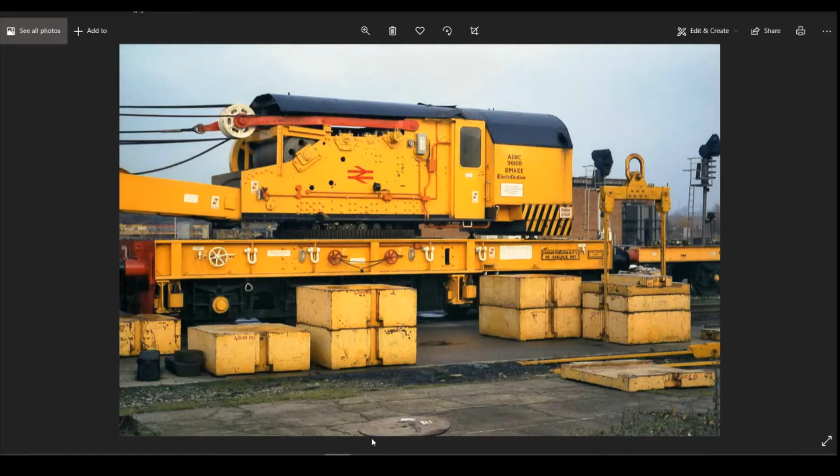In the last episode we drew this little jib here that holds the pulleys. As I said on that episode, what we're looking to do today is draw off this drum which holds all the cable here, and then the little frame that goes above it.

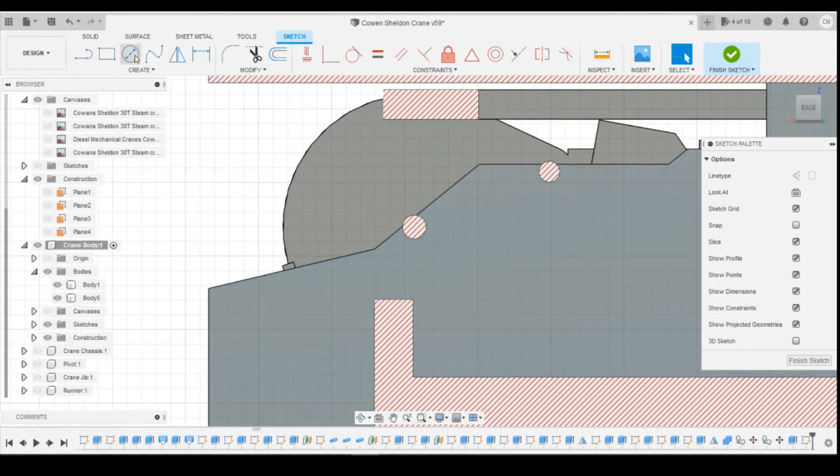Okay, so jumping into Fusion, first thing we're going to work on is adding in the drum on here. So if we create a sketch on the inside surface here, and slice through to get to the inner surface, we create a circle, so it's going to be on the inside. We need to work out the diameter here - you can see it's about half the diameter of this big one here, so that's 9. So we're going to go for about 4.5 millimeters, something like that.

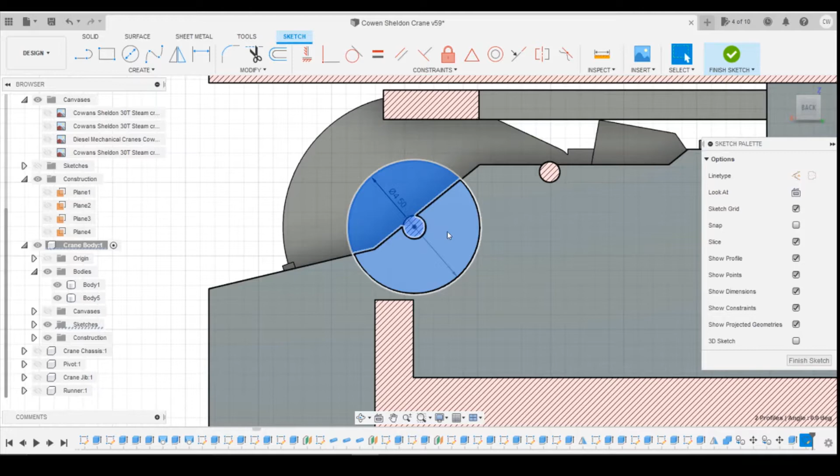And then we can extrude this all the way through. We need to turn that slice off actually, and we can drag that through to the side here to join.

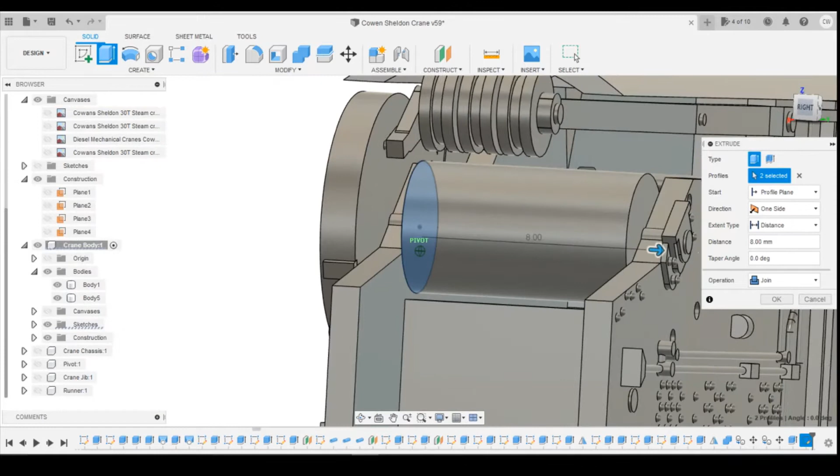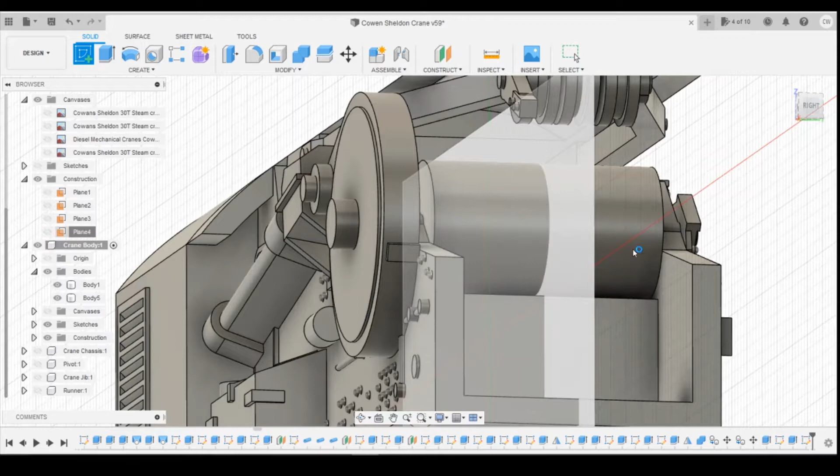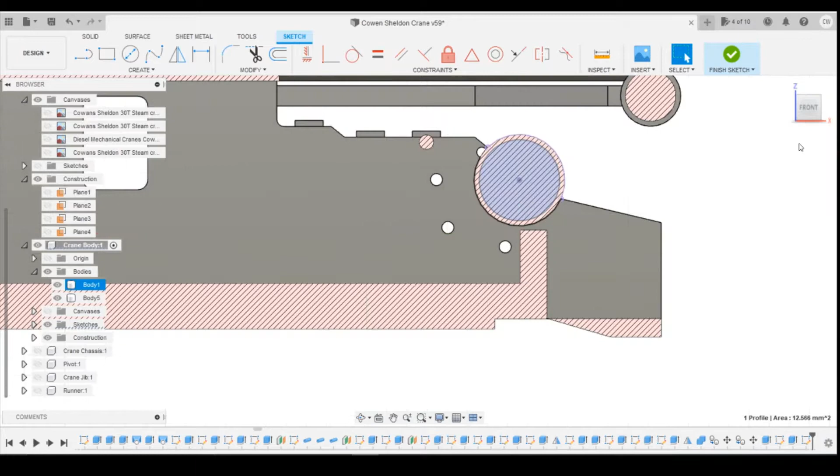What I'm then going to do is create - yeah, I'm going to create an offset plane from - actually, we can create a drawing on that inner plane here. Slice through, let's project that circle, and then we can draw one there. Actually, going to go for 4 millimeters, and then extrude that symmetrically.

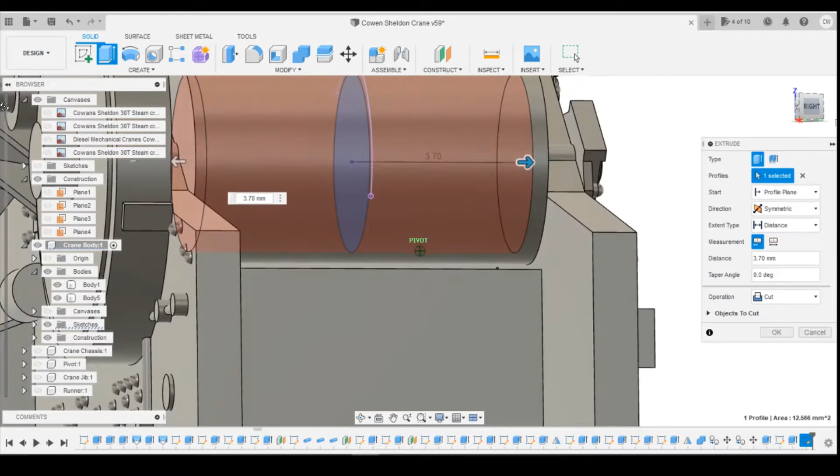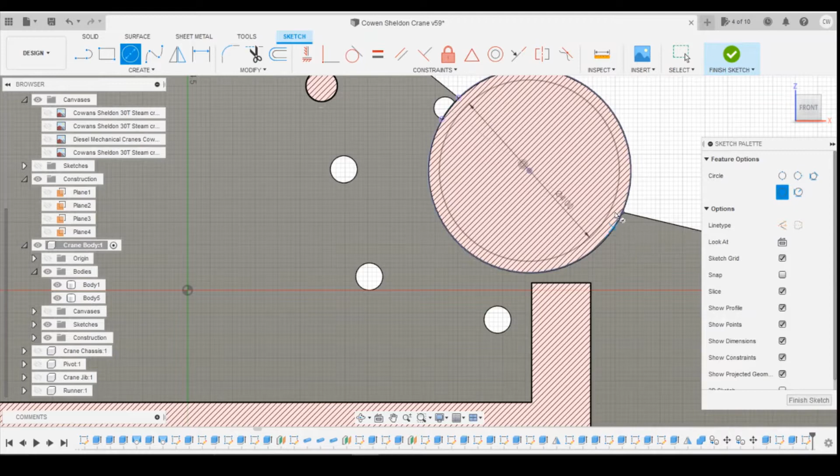What I'm looking to do is just leave a little bit either side, taking a chunk out of the middle. Actually, I've selected the wrong part there, let's go back into that sketch. Slice that, I need to project this part as well, and I need to select - I need to draw it. Actually, then I can select that section there, extrude that symmetrically. That's what I'm after. So I'm creating sort of a recess on there that I can wrap some thread around that goes up to all points.

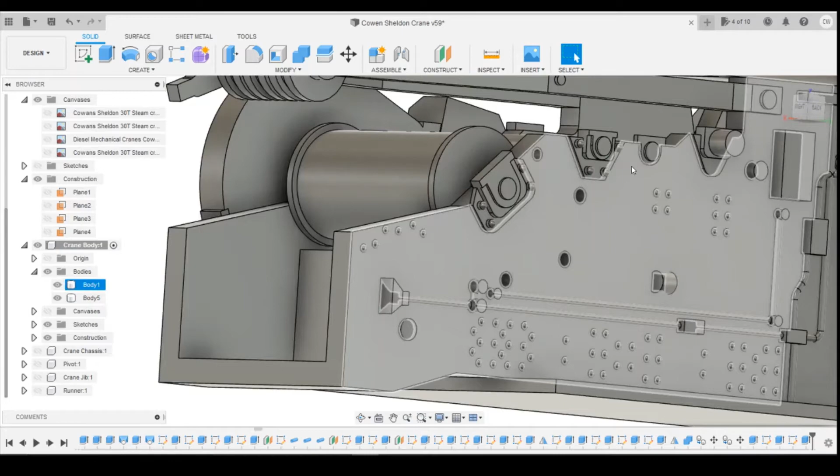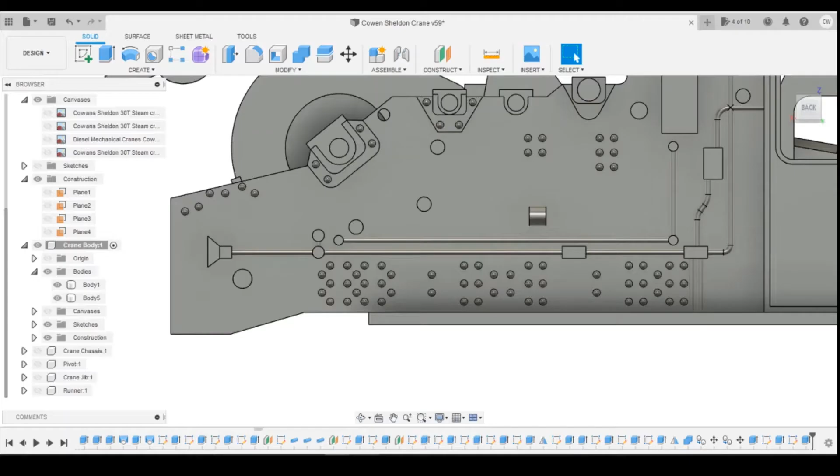Okay, so the next thing I'm going to be looking to do is draw this frame, which isn't going to be as easy as it looks, unfortunately. So first thing I'm going to draw, I think, is this upright here. So that ends sort of where the rivets are, in this sort of area, and it goes up diagonally and sort of rests on the bottom of the jib here.

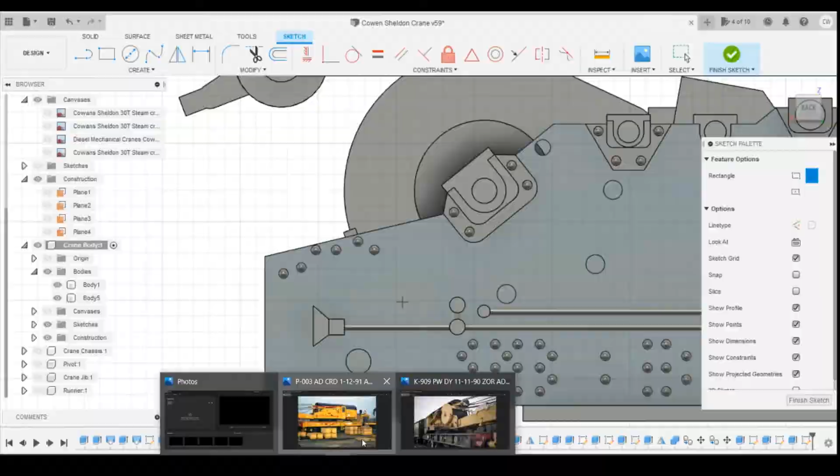So create a sketch here. I'm going to be using a 3-point rectangle because it's a slight angle. Height wise, it starts just below that rivet, so about here. Let's go upwards actually, at that sort of angle. 0.5 millimeter thickness.

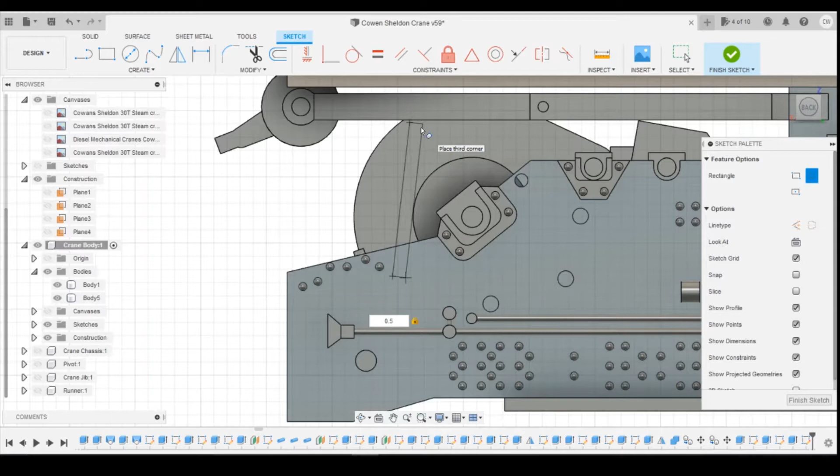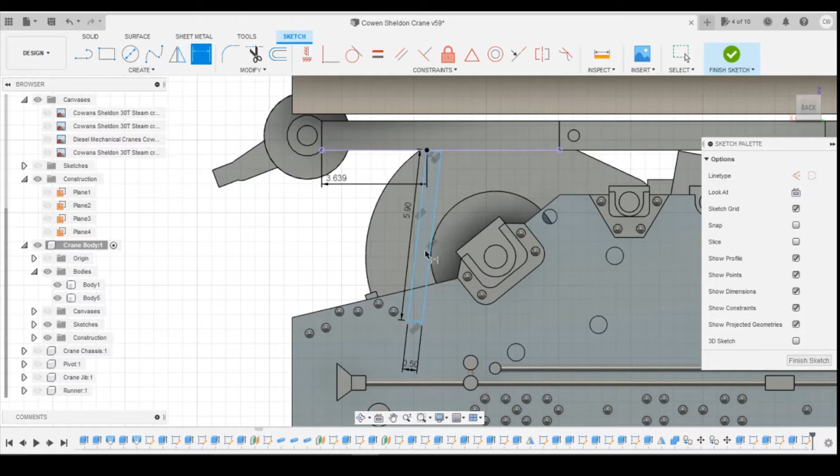And then I'm going to coincident that to that line. Okay, and define measurement - I'm going to do 5.9, easy. Distance from there to the end of the jib - I'm going to leave it where it is, 3.639 millimeters. Also it wants the angle defined, so angle from there to there, and that should define that.

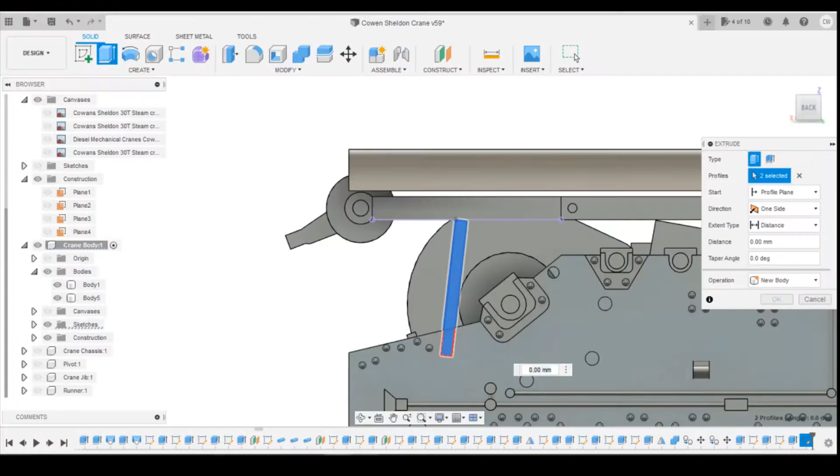Okay, so when I extrude this now, same as before, I'm going to create that as a new body, and that comes outwards from that face. So I'm going to come forward to say 0.4 millimeters, and I want it as a new body so that I can move it across to the other side.

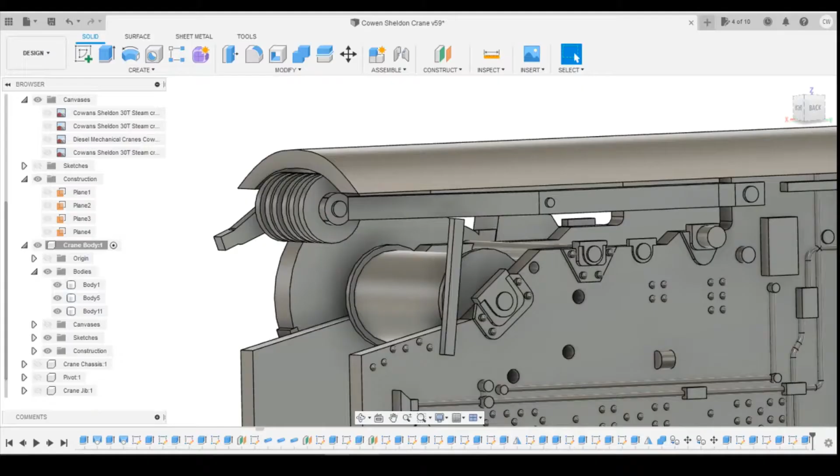Okay, so the next part comes across and joins the frame here. I'm going to create a sketch on that face, drawing on this inside face of the beam we've just drawn. And maybe 0.6 millimeters - how does that look thickness wise? No, it's probably thicker than that. Let's go 0.8 millimeters. Define the width - it should be the same as the beam here, 0.4.

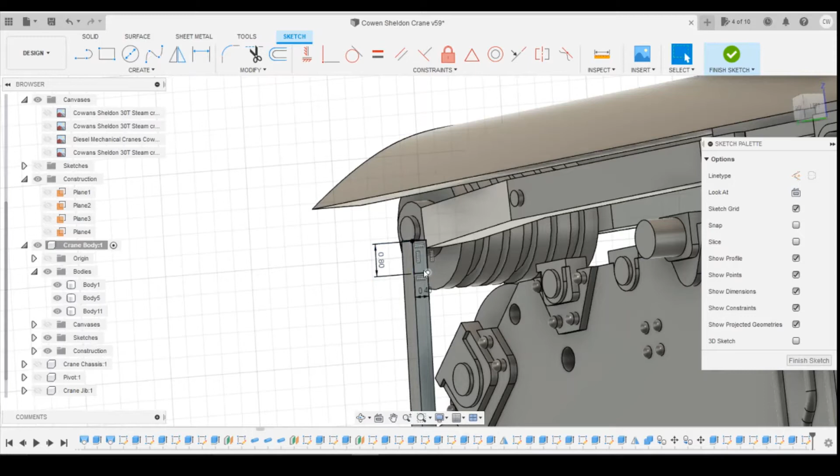And then we're going to extrude this, and hopefully this will come down to where we want. It needs to get to this corner, unfortunately. So what we could do is make that a little bit thicker - it probably actually looks like it needs to be a bit thicker. Lengthwise, 5 millimeters, looks like it's okay. So if we just go back into this sketch, let's make that 1 millimeter.

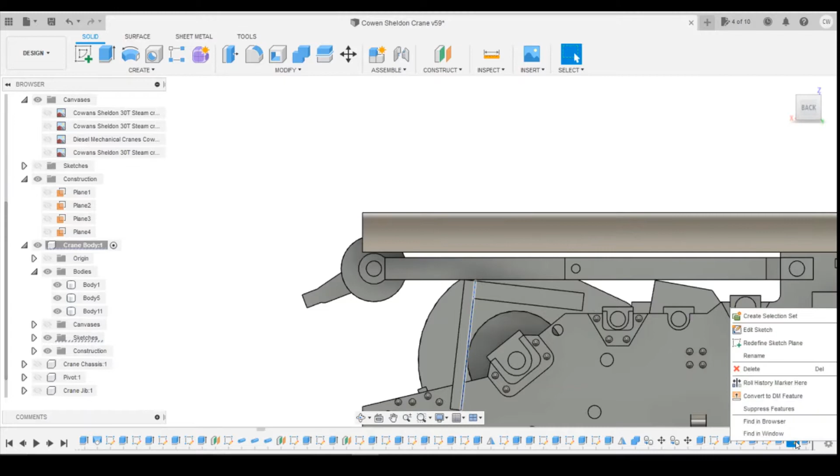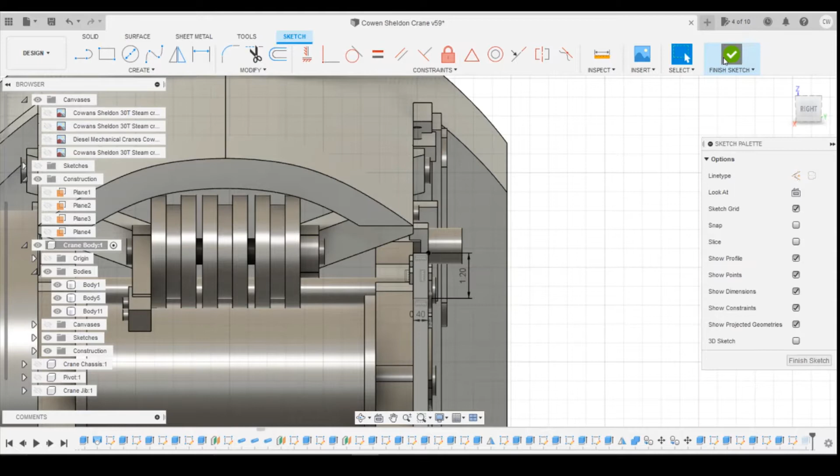This is now touching on that plate there. Probably wants a little bit more actually - 0.2 millimeters. That looks better.

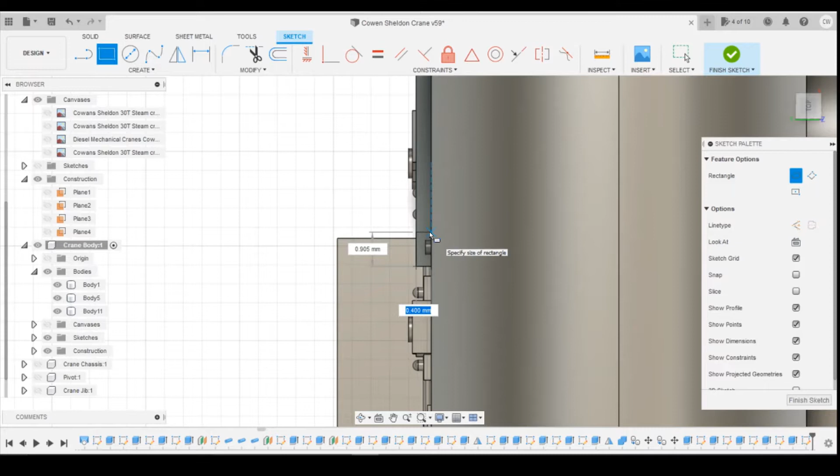Okay, and then on the top there's a small little plate that comes upwards and this rests on. So we can just draw that on there. It's going to be 0.4 thick, and 0.8.

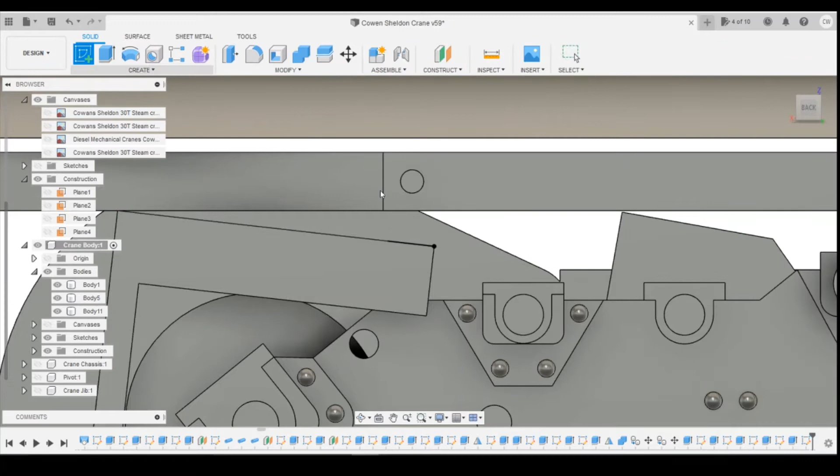Do a sweep, I think. Finish that sketch. We could sketch on that surface here. Just draw a line upwards. That's going to be coincidence to that. I don't want it joining there, so I'm going to turn it off now. Then finish that sketch, and as I said, I'm going to sweep that profile along that path.

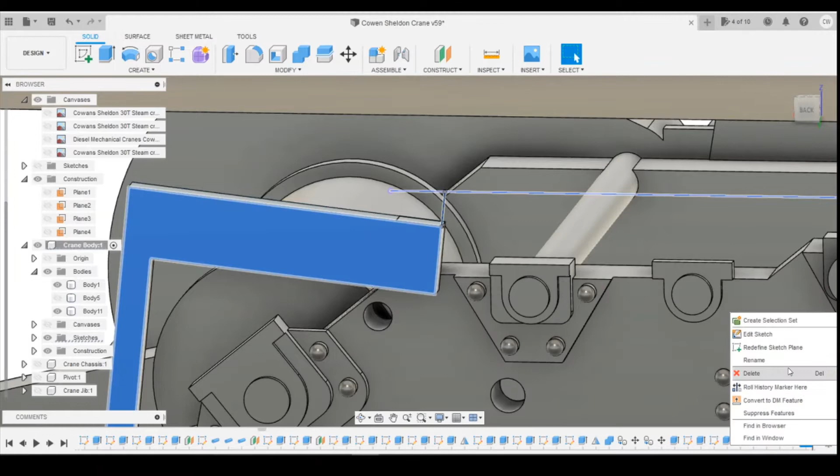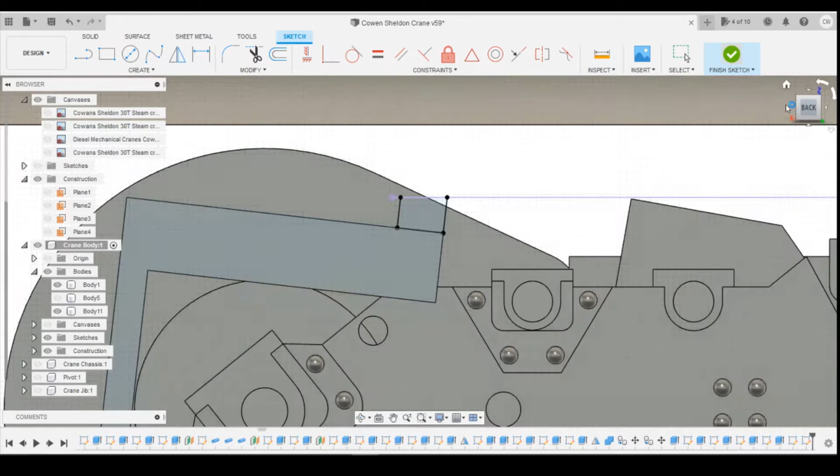I'm going to create another line, so I'm going to create a negative sketch there. Draw another line. It's going to go from that corner, so I'm going to have to coincidence it to that corner and come upwards. That's going to be that to that point there, and that's going to be to that point there.

Use the sweep tool to take that profile along the path, and guide rail along that profile. That's one.

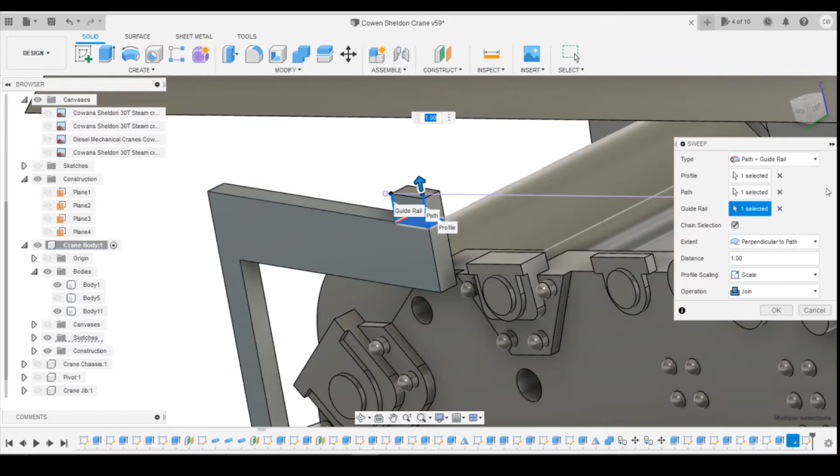Extents like that. So then you've got a sort of diagonal top here that this beam's going to then sit on top of. Hopefully that should join to body 5.

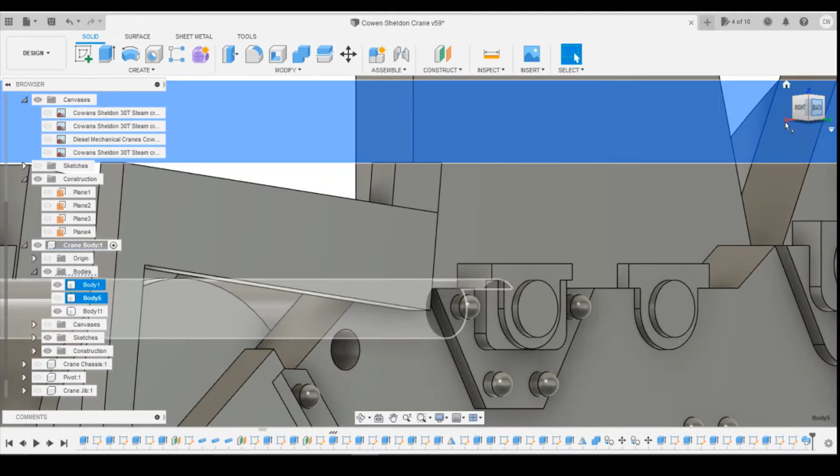If we turn that back on, we've still got body 5 separate, but it's sort of inboard, so we're going to have to drag these inwards slightly. Let's turn off the body.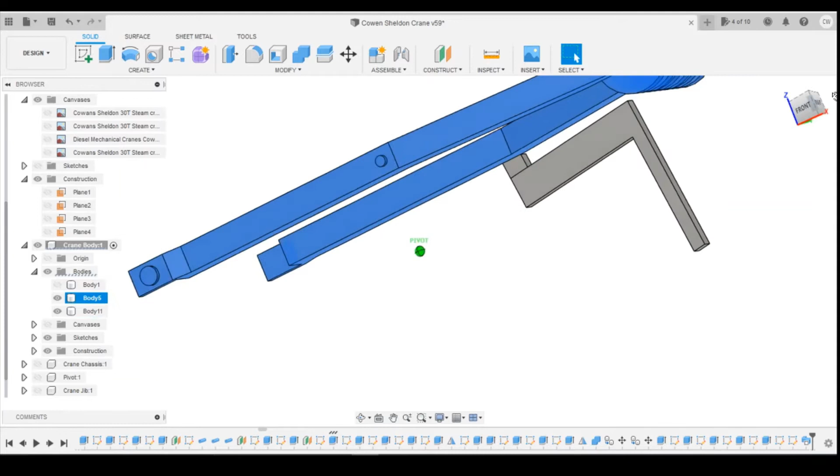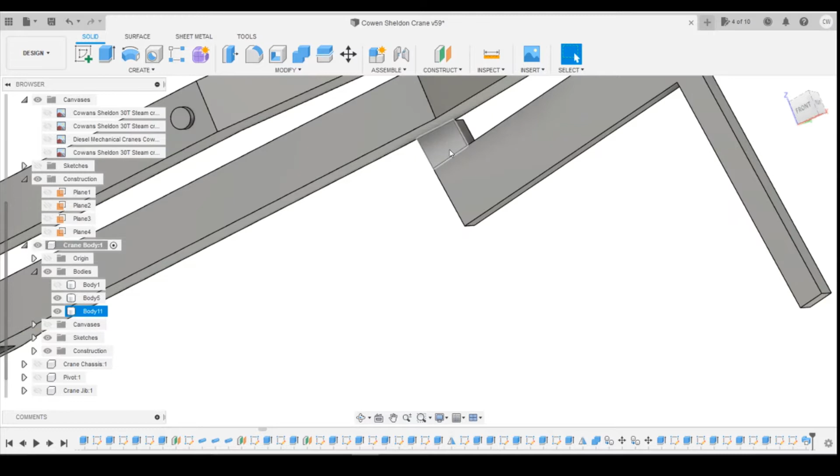So this profile here, extrude. I can't get that profile for some reason. Okay, so if we put a sketch on that surface, gone. So it should be on that surface there.

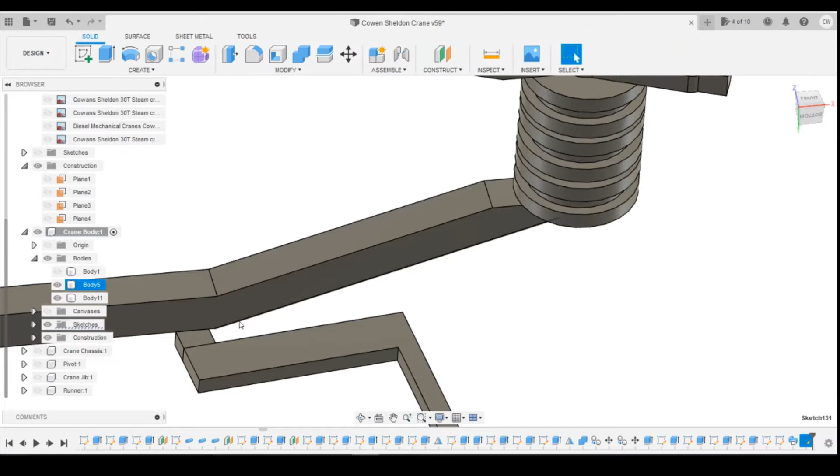That sketch looks messy, let's start that again. Delete that sketch we just had. Okay, so sketch on that surface there. Coincident that.

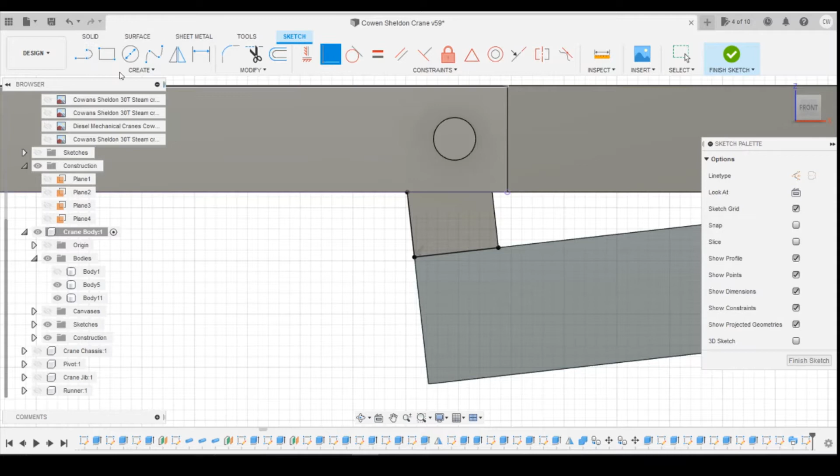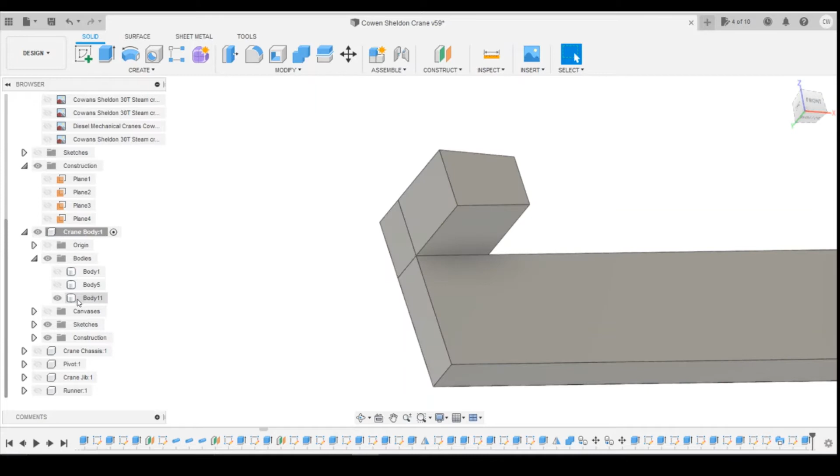Hopefully that won't join onto body 5. It does, but I feel like I can change it. It hasn't, good. So that's now sort of a resting arm for this to sit on.

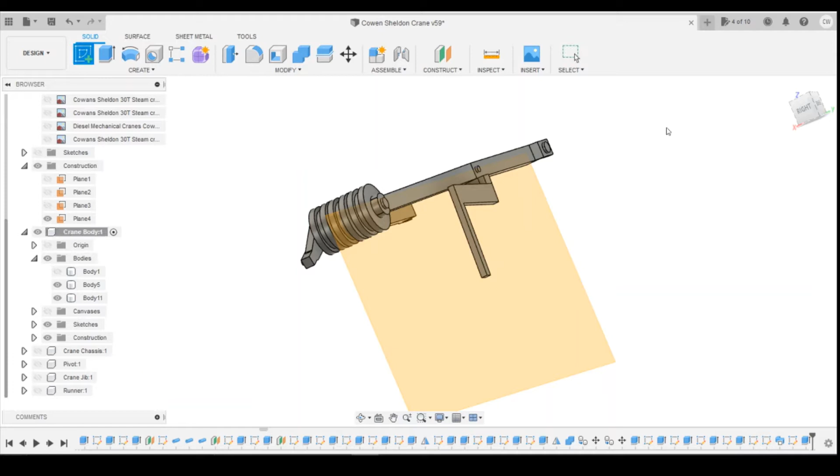Okay, and then it's got another one that comes across here, and we're going to bring this across to the midpoint, so the mid-plane, this plane here. Create a sketch on the inside surface. Turn that plane off a second.

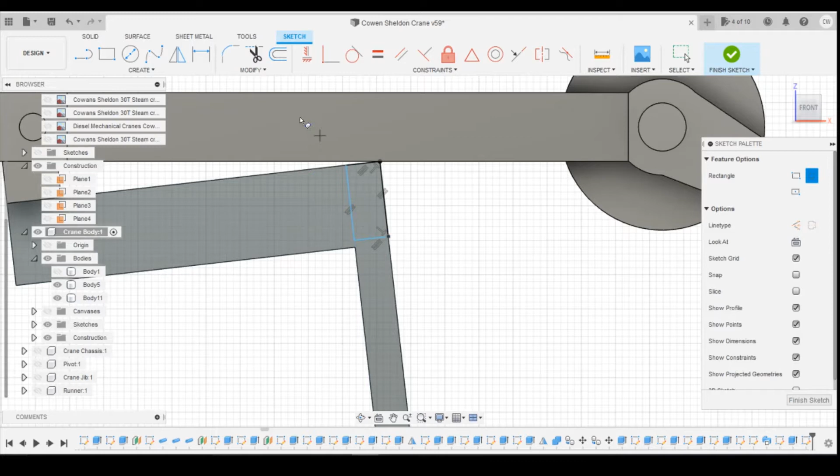So you can see it's just like a beam that goes across. It's going to need to be a 3-point rectangle to be able to draw the same angle as that. So for coincident, that corner to that corner. And we can extrude that distance wise, we just extrude it to plane 4.

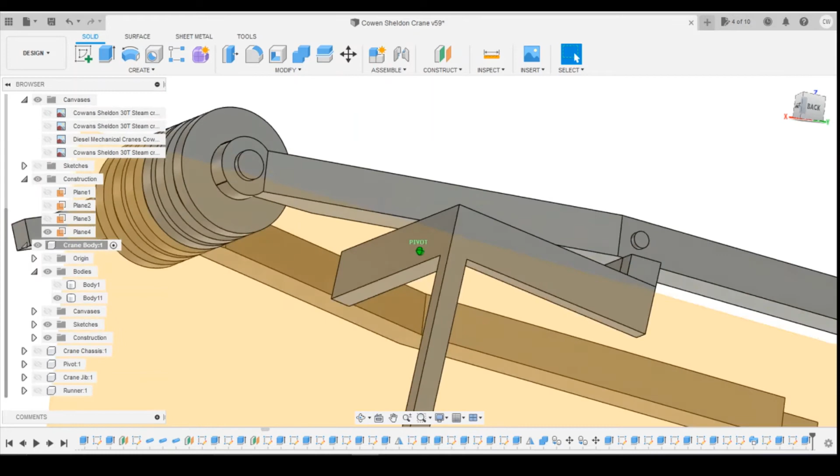Join. So now, ooh, what did that join? I shouldn't have joined 5 on. Let's undo that. We don't want to join to that body there. Okay, so let's try that again. So extrude that to plane 4 and join, keep body 5 separate.

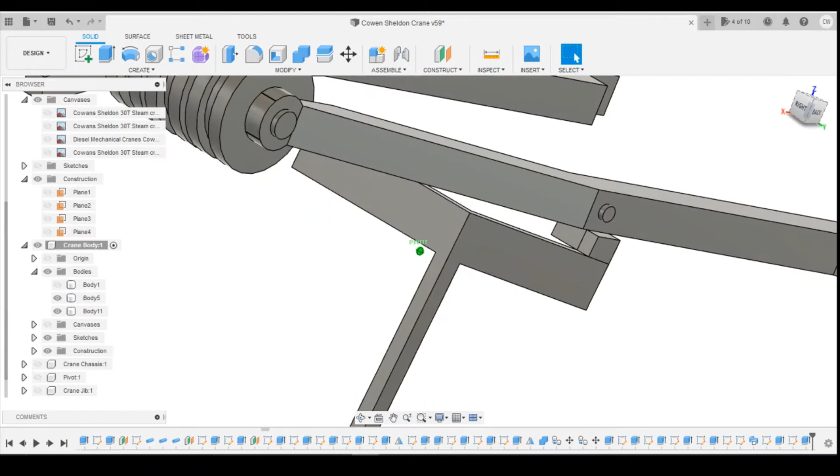Okay, now let's look at some of the detail that's going to have on here. So it's got like a little recessed area there.

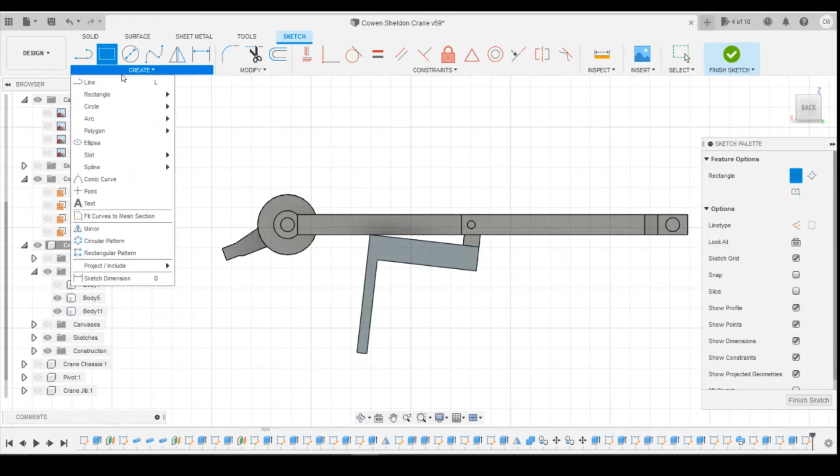Draw the front base, it's just going to be a rectangle. Again, we're going to want the 3-point rectangle because the angle is like that. Define distance with the picture, sort of midway along, isn't it? So that to that.

In fact, if we coincident, oh no, that's not what I want to do. Coincident that corner to there, that's what it looks like. I can find out what that distance is. So that was 0.8, and then we define the distance from that corner to that corner because it looks pretty much centered.

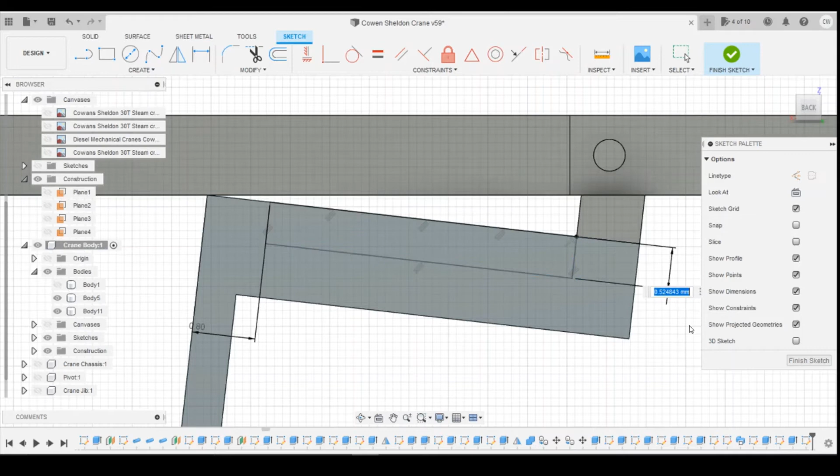Actually 0.8. Height 5.5 - no, that's not what I wanted. 0.55. And then pull that forwards, 0.4. It's got that.

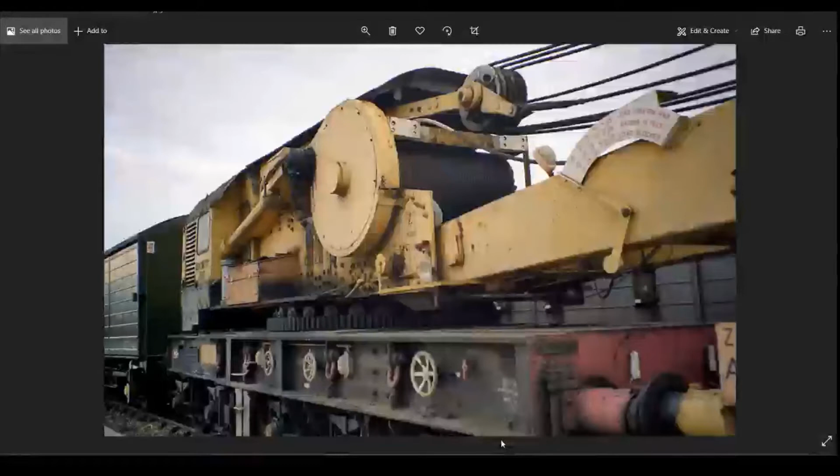So looking on this photo, there's a couple of small boxes on the front here, so I'm just going to draw those on this front surface here. If you look at this bit here, it looks like it's sort of level at the front here, so this panel might actually need to be recessed slightly. So I might just go back and edit that.

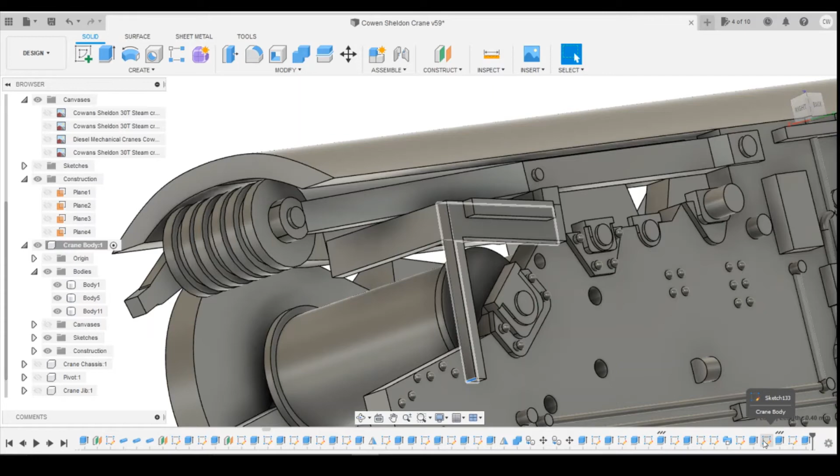Yeah, I'm going to take off - which constraint do we want to take away? That one, so this one here deletes a constraint that links it to that point. And that constraint links it into that top column, so delete that constraint as well.

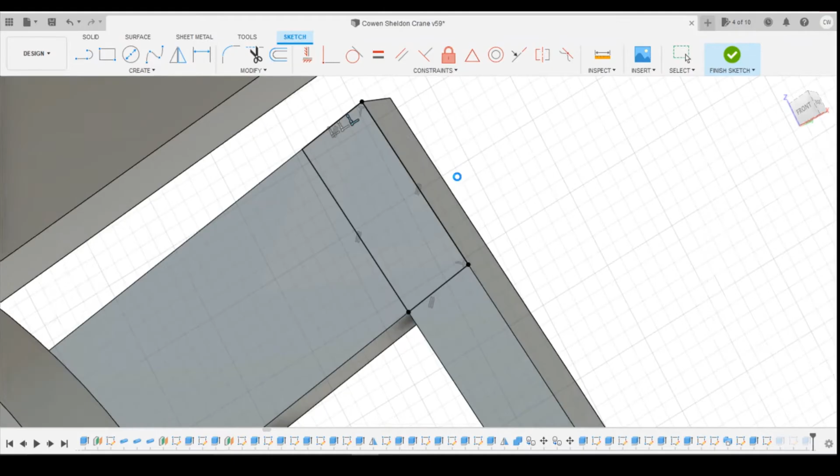It's just lagging, hopefully we should be able to move this now. No, okay, so if we just delete that actually, you can draw that again. So 3-point rectangle, and you're probably actually going to want to start at this point.

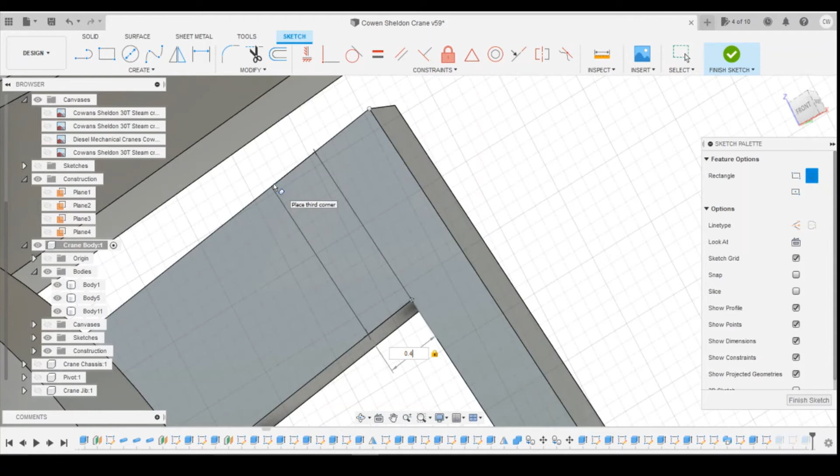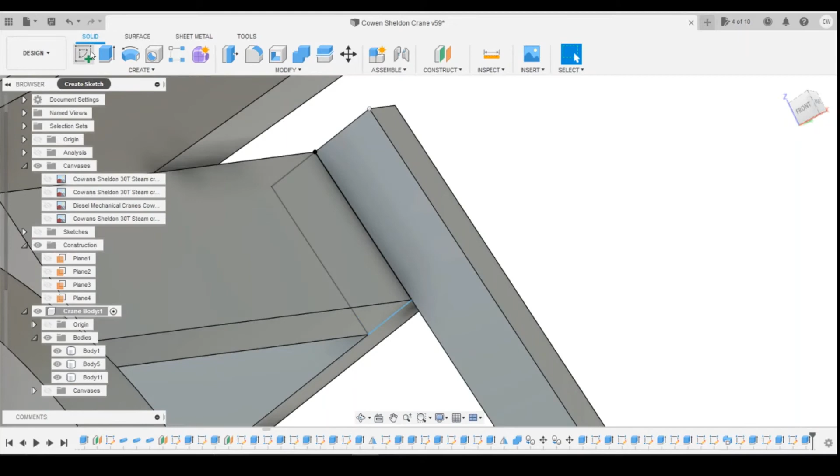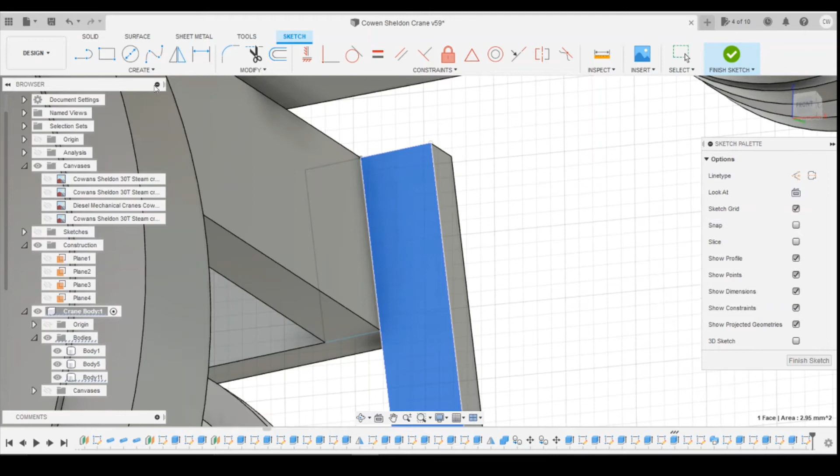Why is it not moving that? So project, we should be able to just project off of that. So there, so there, and down to that point. And then we can extrude this forwards.

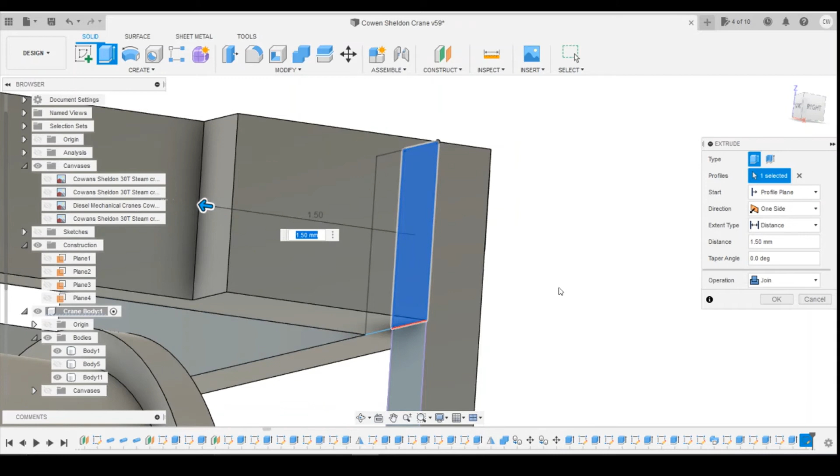It doesn't look like it comes particularly far, maybe that. Turn that body off to make sure it doesn't join to that top body. 1.5, make sure it doesn't join to that top body. Okay, we'll bring that back in.

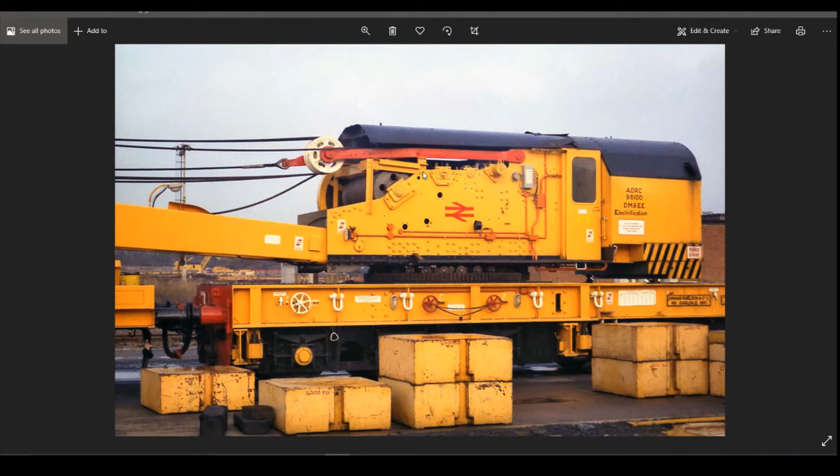I might, yeah, no, that's fine. Okay, so what's next? I think we're going to be drawing some rivets on here next. We've got a couple here, 4 in here, 4 up here, I think. Okay, so if we draw the 2 down on this one here, the surface.

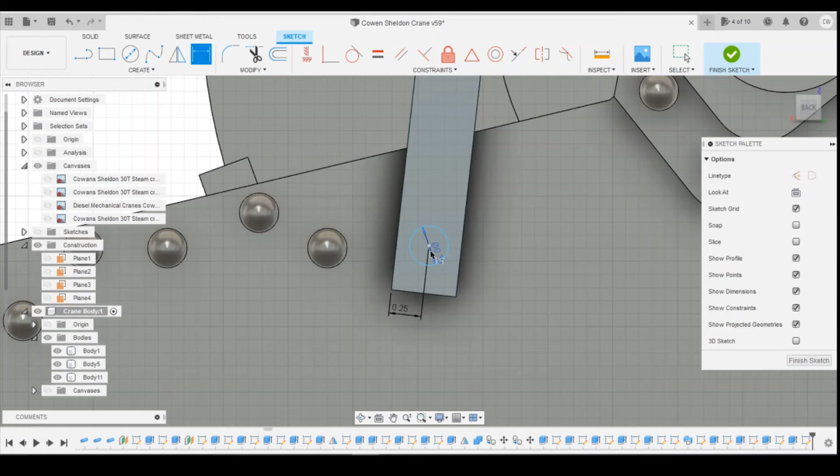The width there is 0.5, so if we define the distance from there to the edge, that's 0.25. From there to that edge, 0.3. Extrude forwards 0.15, and then chamfer off the top edge, 0.15.

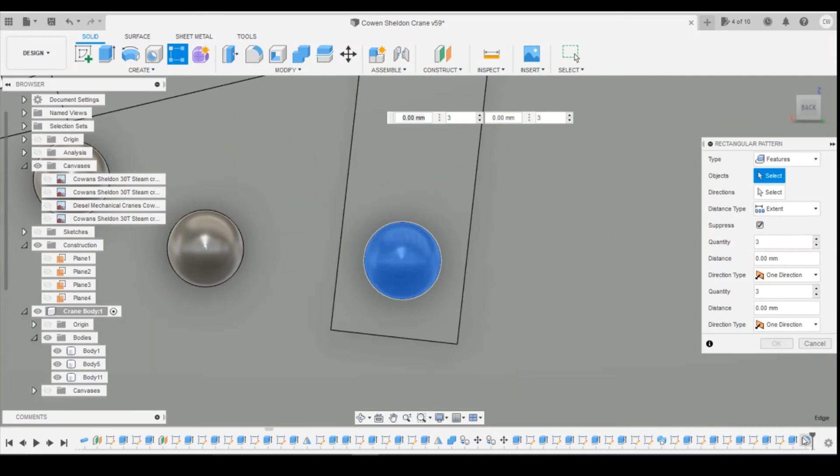And then we can rectangular pattern that feature. So select that and that direction. We can select the diagonal there and it will come up. We only need 2 of them. So these 2 bits here.

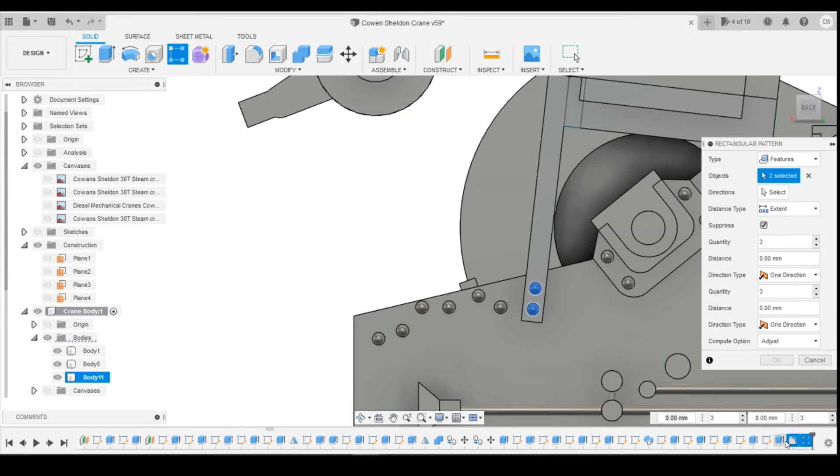We've got 2 more to go at the top. So if we now pattern that pattern and the original rivet, direction, we'll bring up that surface there. We need 2 of them. We can get them at the top here like that.

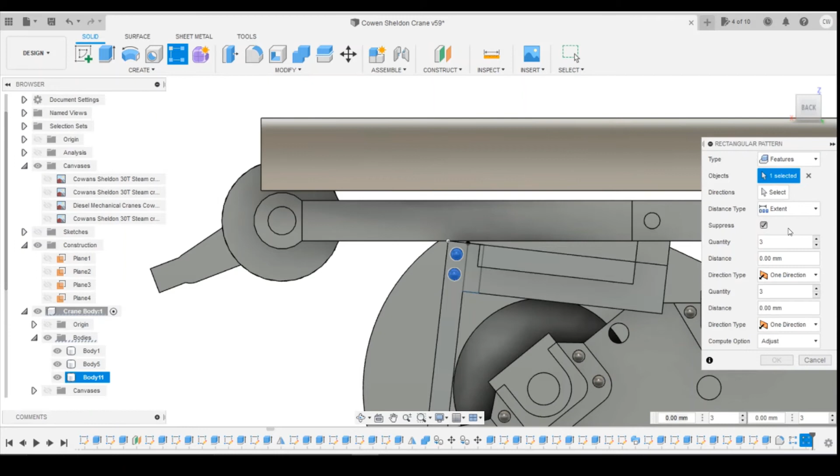Okay, and then we can then pattern those. Direction is going to be down this line here. And we need 2 because they're next to each other here, like that.

Oh, we didn't like it. Okay, didn't like that. Okay, so let's do this a different way.

If we go into here, edit that feature, it won't let us now come in the other direction. If we do that, it will.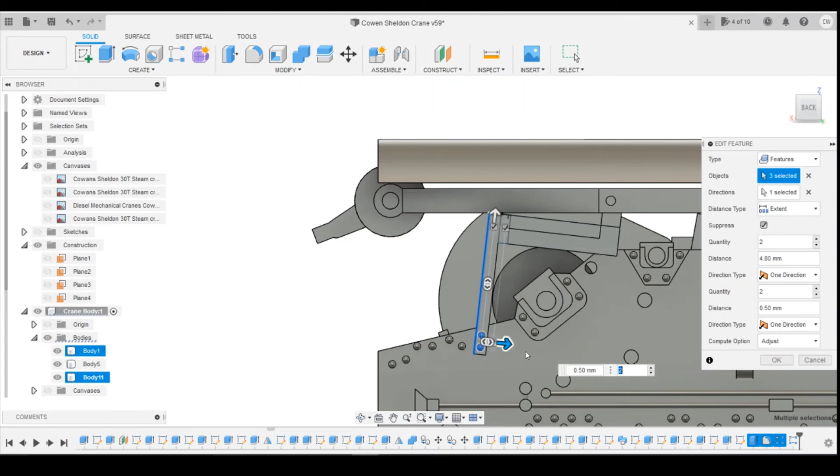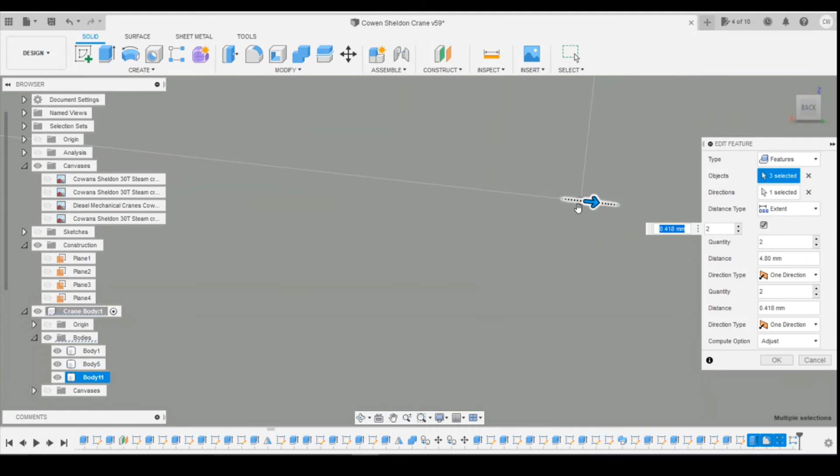So if we come across like this, that's it, but then turn off that checkbox. Can we get in there without touching the arrow? Get to the checkbox. There we go, got it.

Okay, so now I pattern it there, but not that one, which is fine. Cheating works.

And then if we do pattern on, no, we'll just draw these up here. So there's 4 of them.

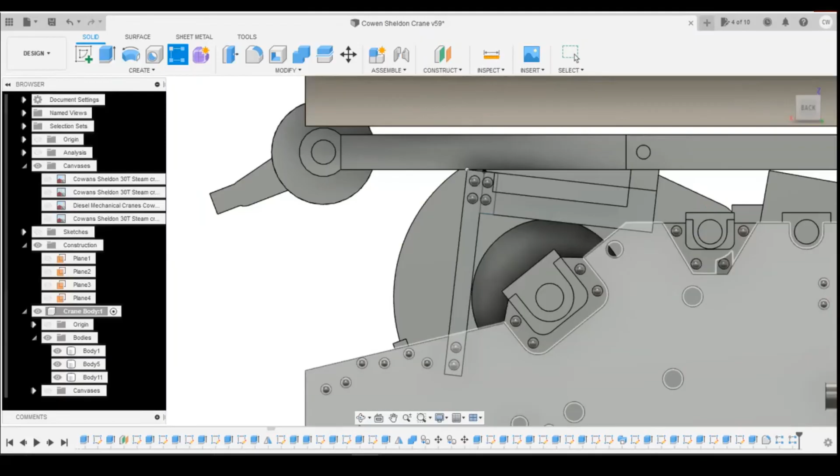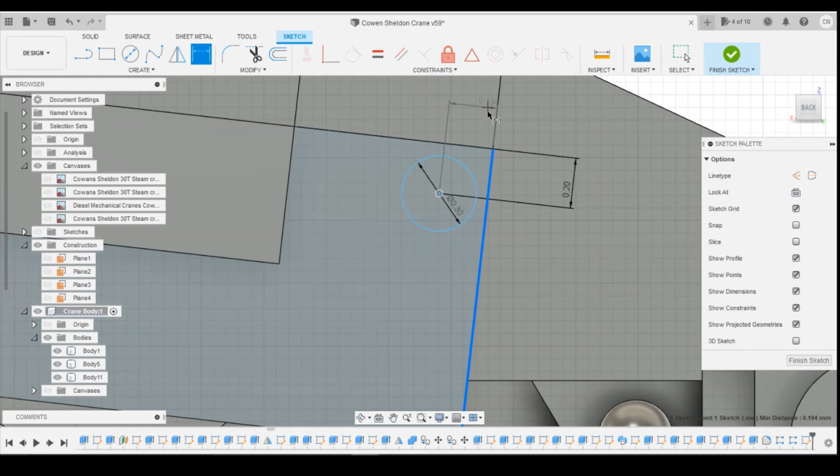Distance there, 0.2. We can do the distance to there. That's 0.2 as well.

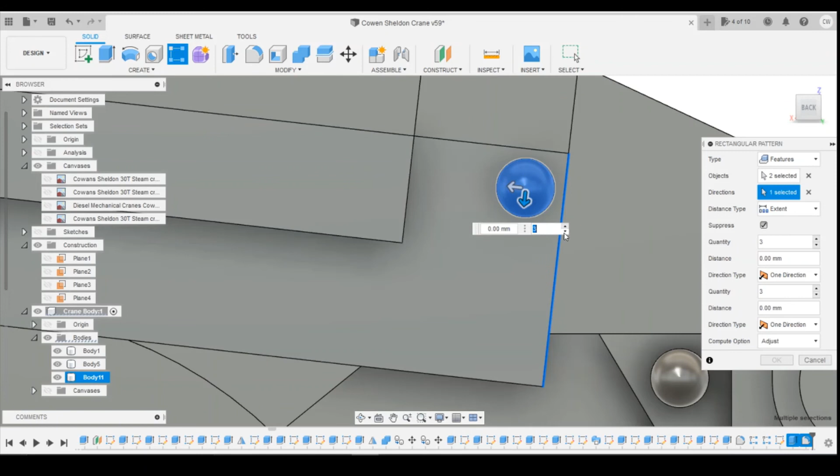Pattern those features. Two down. Two across. So there's our 4 in that area.

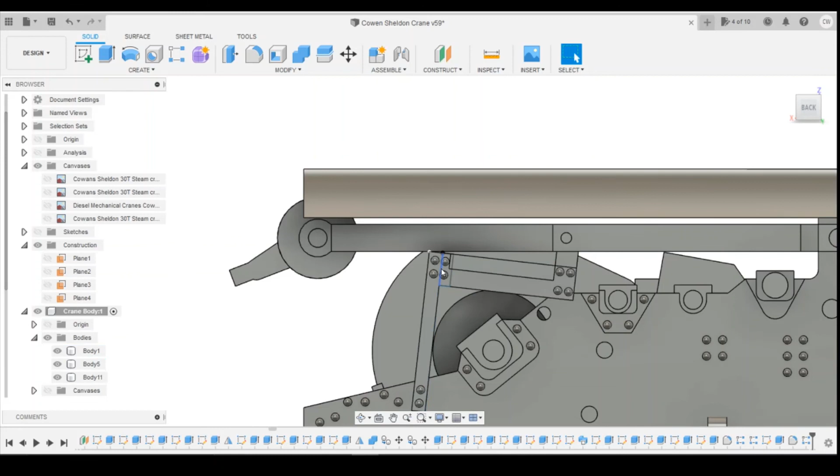They do look slightly different to these ones, so I'm not worried about them not being the same space between them. And again, they're tiny, you're hardly going to notice these in N gauge. Even in double O, they'd be difficult to notice.

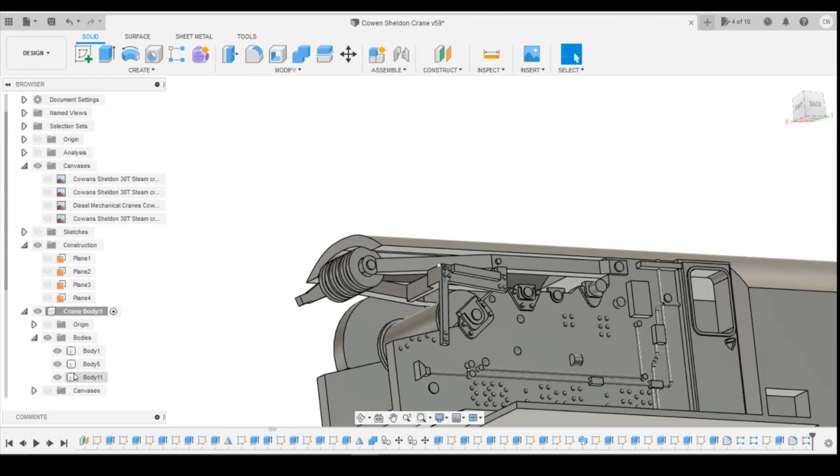Okay, so detail wise, I think we're there or thereabouts really with this. So what we'll then do is turn these off, and then we can mirror that body on the inside surface here, which we know is the mid plane.

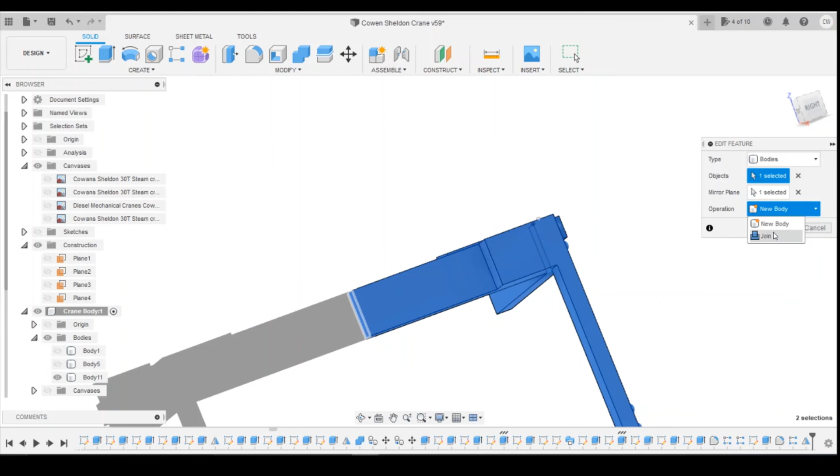Actually, let's go back into that feature. They should be joining each other. So we should just end up with one body here. When we turn that back on, you'll find that this is all hidden in the back here, which is fine. I'm happy about that.

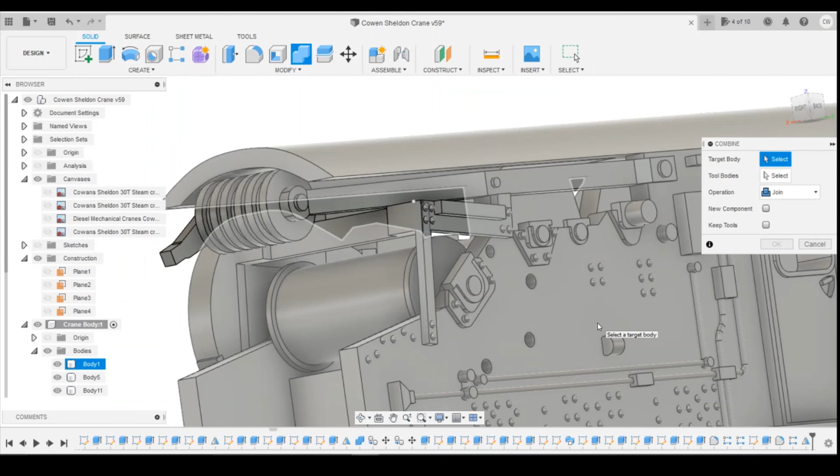It doesn't really affect the model because we're going to combine these now. I didn't want to combine originally because I want to maintain that body 1 name for the original. So we can select body 1, and tool body is going to be body 11, which joins these two, keeps this separate.

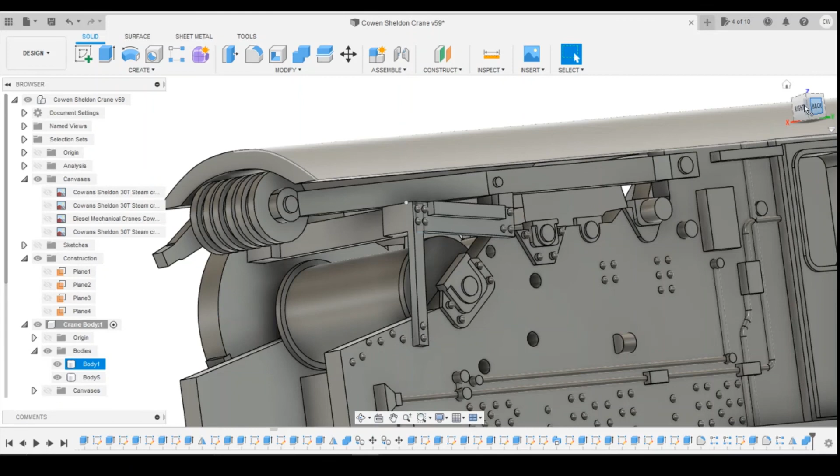Okay, so as I say, that's that drawn now. We've now got this drum on the inside, we've got this supporting arm up there. So it's really starting to come together. We've got very little left to do now. So yeah, coming together nicely.

I'm going to finish this lesson here, and then we'll come back and do a bit more work on the next lesson. Hope you've enjoyed watching.